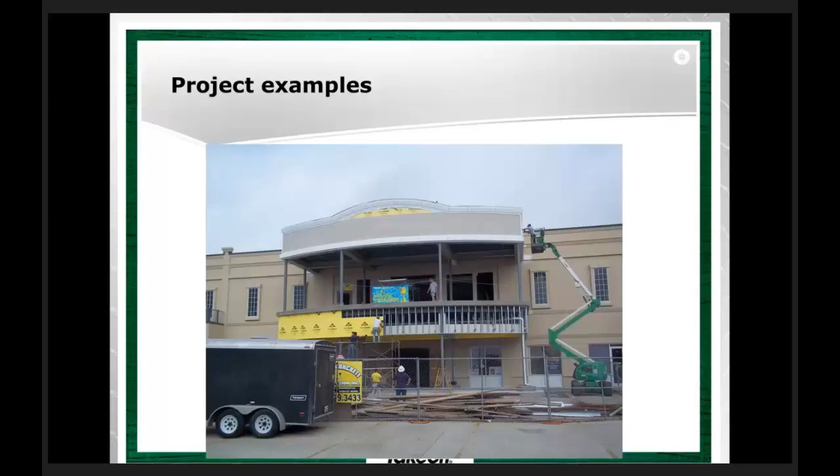That's great. So obviously it's going to help you gain the ability to bid more projects, which will have an effect on your bottom line. Yes, once you really get quick at it, you can knock some sheets out really, really fast.

Now, in regard to this project, what would you do differently if you were to do this project again? The one thing I would probably do differently is definitely have more meetings with the owners about all the changes they wanted to make up front, which really would have saved us a lot of time getting the estimate out and more accurate the first time, because we had a lot of revisions on this project. We have an owner that's pretty picky and also wants to save money at the same time, so they made a lot of changes. It would have been a lot better if we could have gotten that solved up front, and it would have made everything go a lot quicker.

Sure, understandable. It sounds like the overlay feature in On-Screen Takeoff helped streamline that communication a little bit, allowing you to identify those changes immediately. Yes, it does.

We actually had conference calls with the owner because one of the owners lives out of state. We literally overlaid the drawings while on a conference call and discussed the changes they were making. One owner was talking to the other owner, since they're partners, and they were actually disagreeing while we were on the phone, and we were trying to make suggestions to them too. So the overlay feature really came into play.

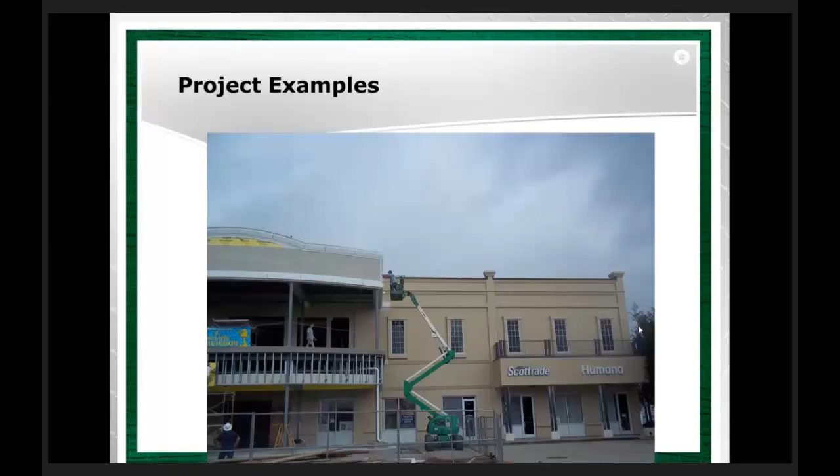So Ricky, we have a few questions from the audience I want to pose to you, if you don't mind. Sure. Question one, which pieces of automation do you own from Vision InfoSoft? We have the EBM Pro 3000 that we use, and we have that linked up with the On-Screen Takeoff Pro.

Question number two, where do you get most of your business from? Most of our business, we do a lot of public bid, and we also have a lot of private entities we deal with, a lot of continuing customers. We do work for banks, a lot of banks. We have a couple of high-rise buildings in downtown New Orleans we do work in. We're actually in a couple of oil refineries as well, one here called Valero, and the Domino Sugar Refinery, also in our area. So we try to stay diversified, and a lot of it is reoccurring business. We try to maintain a real good relationship with our clients and have reoccurring business with the clients we have.

I have one last question. How many people that work for you use the software, and how do you train them? Actually, I am one of the only people right now that do.

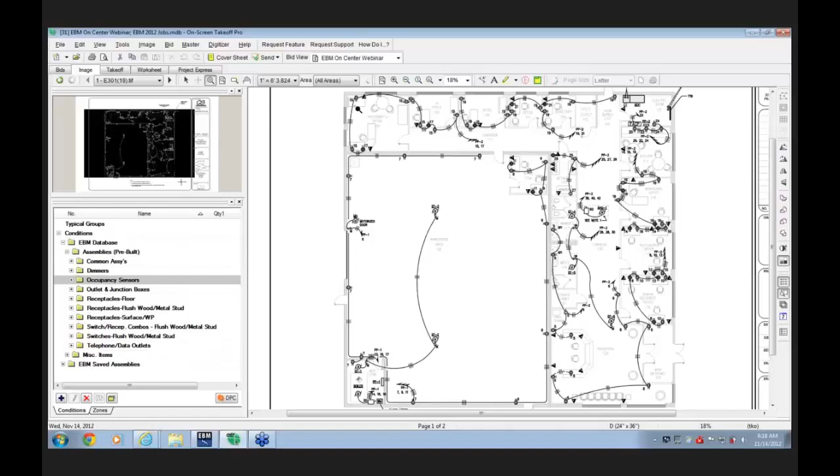So I'm going to start by counting some receptacles here. I think I'll zoom in a little bit further so you can see a better view of the drawing. Over here I have a folder called Receptacles, Flush, and Wood or Metal Stud.

I'm going to go to Duplex, and then I can pick any of these assemblies. You can see they all have different color associations or color codes with them. I'm going to pick this 20 amp duplex with a spec grade receptacle with a plastic plate. Then to count, I just click with my mouse.

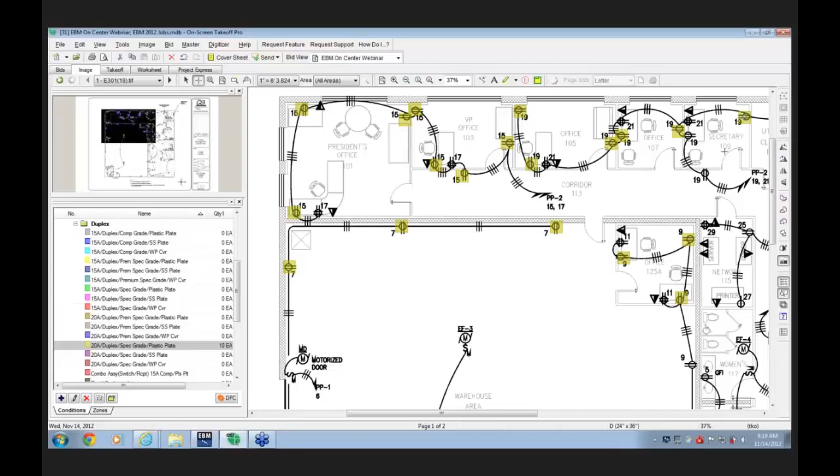You'll see it makes a mark on it, similar to how it would with a highlighter if you were counting manually. So I'll just click through a few of these, and then continue on to the rest of the drawing. Now, you don't have to finish counting all the receptacles at any point. You can come back later and count the rest of them, or move to a different item or assembly at any point.

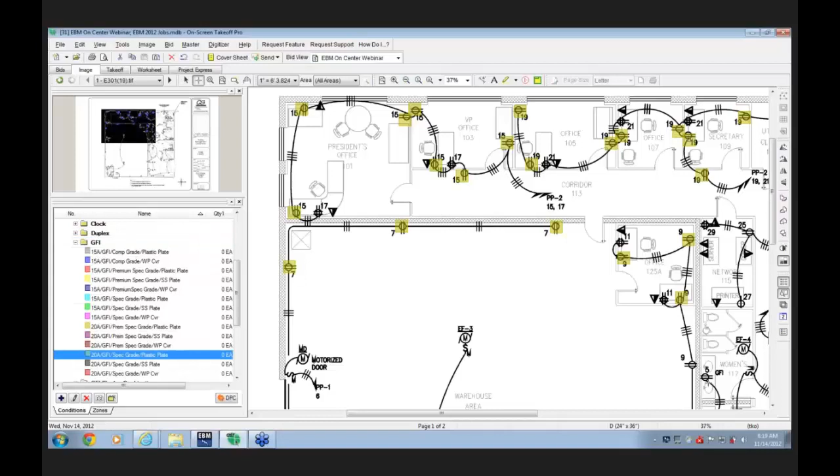Now the count so far is 21. I'm going to count a different item next. I'm going to go to the GFI receptacles. Down here is a 20 amp spec grade with a plastic plate. I see one here. I can move over and down the drawing with this little black window called the pan window. There's another one down here. I'll close that folder and do one more count.

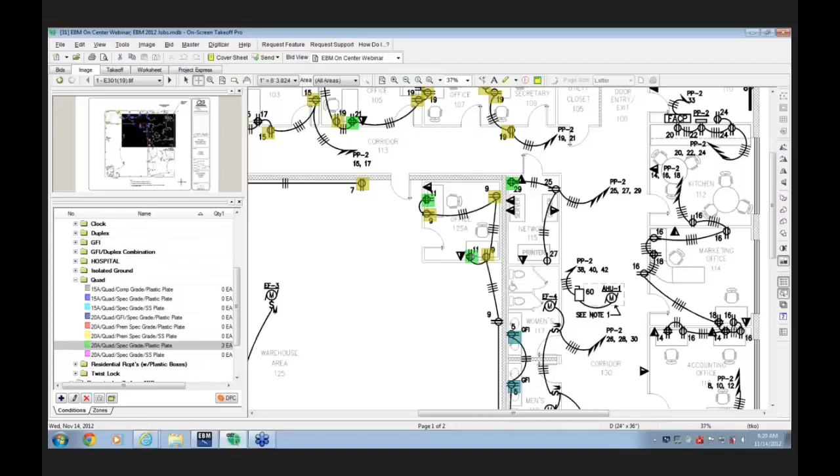I think the concept is pretty straightforward here. I'm going to go to the quad folder, and there's a 20 amp spec grade with a plastic plate. That's this little symbol with the cross hatches here. And again, I'll just move on.

Okay, now at any point that I want to take what I've done so far back into the estimating program, into Electrical Bid Manager, I just click down at the bottom where it says EBM, and I go to the import window. So everything I've taken off so far is going to come into this little window. It even puts in the page number here, so if that page number E301 is already categorized on the takeoff.

And then I see my assemblies here. Here's the counts, these are just the assembly numbers. Now this box is not checked because they haven't actually been entered into the takeoff yet. So I'm ready to go ahead and do that. I just highlighted all 3 lines. I'm going to hit F2 takeoff at the bottom, and it's going to put those into my estimate.

Now those are assemblies. Those assemblies generate all the materials for each of those outlets, a box, a plate, a receptacle, a plaster ring, and even all the screws and pigtails. On my audit trail, I can always look at that entry or those entries.

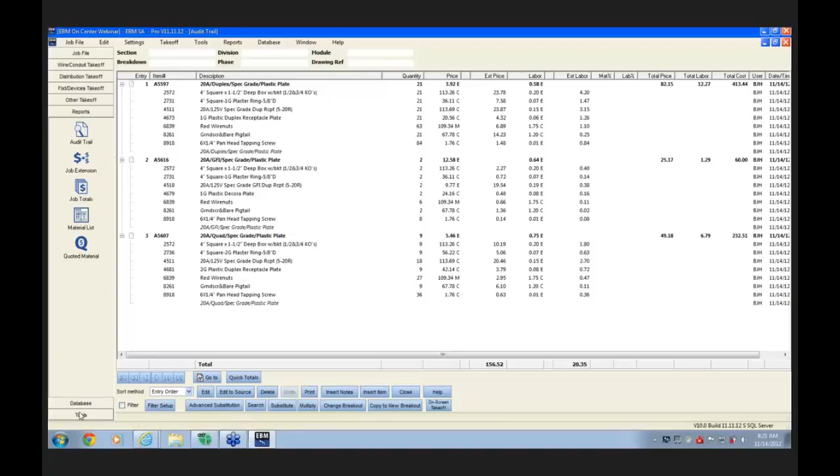So there's the 3 entries I've made so far with all the parts that go with them. So to continue my takeoff here, I'm going to go back to On-Screen Takeoff. I'm going to zoom out a little bit. This is the zoom out button.

And let's talk next about doing a measurement. I'll zoom in just a little more here. Down in the right part of this particular screen that I'm looking at right now is a 60 amp fusible disconnect for an air handler unit, and it feeds back to panel PP2 at the top right. So I'm going to measure that home run.

So I'm going to come down here to the category with the assemblies for the EMT takeoff. And that first one here is 1-inch EMT with 3 number 6s and a number 10.

So to measure, all we do is click on the start point, drag the mouse straight up, and at the point I'm going to turn over to the right, I let up on the mouse and drag it over to the right. Now at that ending point, I can add a length here, because I might have to drop down from the ceiling to that panel. I'll just put in 10 feet.

Now notice over here my distance is set to 49, or my length is already measured at 49 feet. When I add that 10 feet, it bumps it up to 59 feet.

When I go back into the on-screen takeoff, to Electrical Bid Manager, I'm going to refresh my import window, and there's the next entry. Now this one I'm going to review the final entry before I finish it, because I might want to add some additional fittings or elbows to this entry.

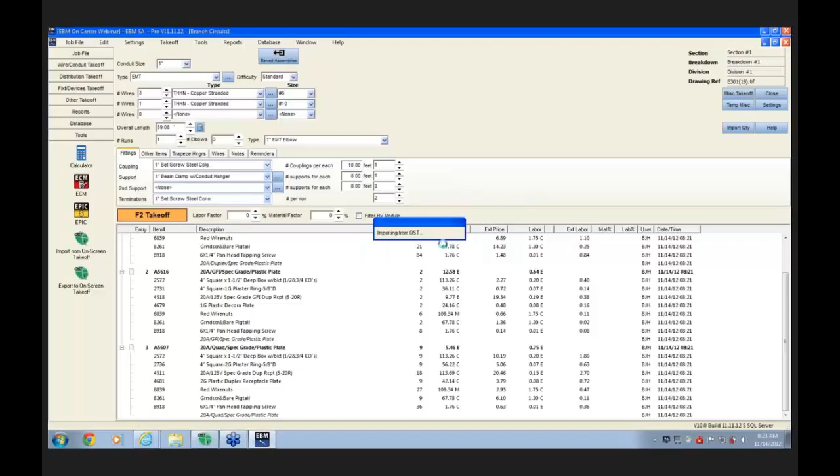I'm just going to hit F2 takeoff. This is makeup wire. Takes me back to the spreadsheet so I can see that that line has been entered. That's what the check mark means. And then I can just proceed with my takeoff.

Now just one little shortcut that I find really handy in the on-screen takeoff. I think you probably will use this on every job. If I want to count some more duplex receptacles, I don't have to go find them again. This little button called the select button allows me to select something I want to continue counting.

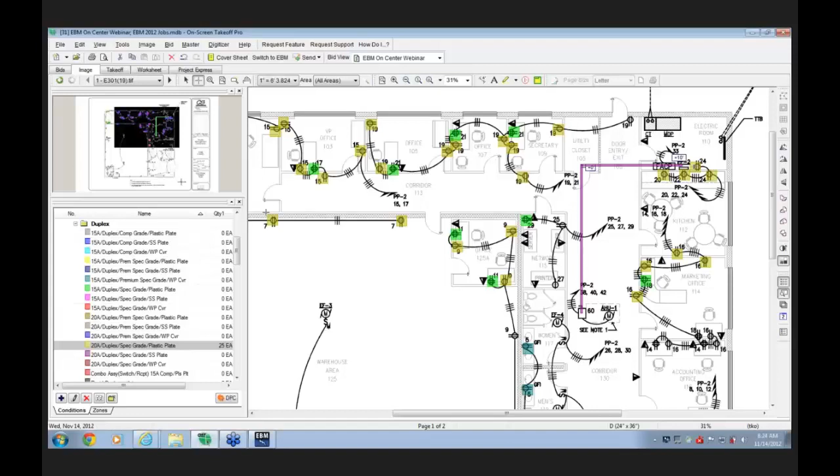And so now I just click on some more receptacles. It's going to update my count. I'll move back down here, and you can see how you can just continue with the takeoff. Now, at this point, I'm up to 31.

When I go back to EBM and hit refresh, there's the 6 more receptacles I counted. I'm just going to hit F2 takeoff, and it combines the quantity up here.

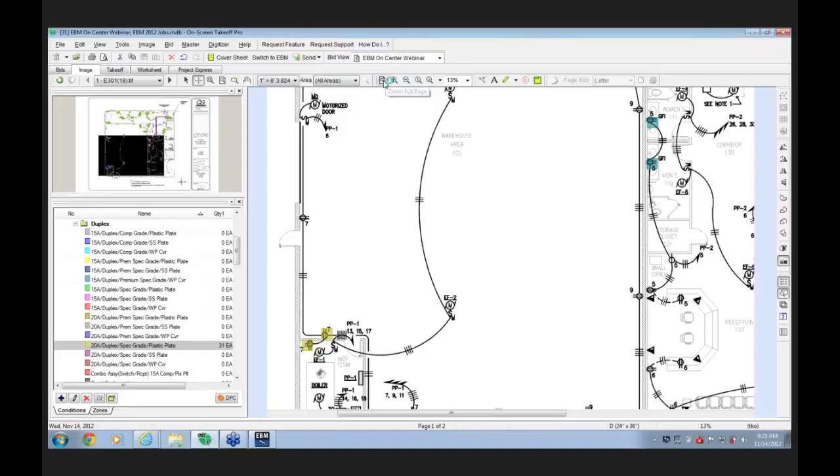And just one more quick thing before we go to the auto count feature. If I go back to the full page here, I can see everything I've done so far. I can also, and this is something that Ricky referred to as that will help you when you're actually doing the work in the field, it's called the image legend. That little button puts a legend up here at the top, and I'm going to make it a little bit bigger.

When I print this out, it'll not only print out with all my markings and colors, it'll give me a complete takeoff on what I've measured and counted on that page. Like Ricky said, you can see how I routed the home run for the air conditioning and air handler unit, and all the receptacles have been counted.

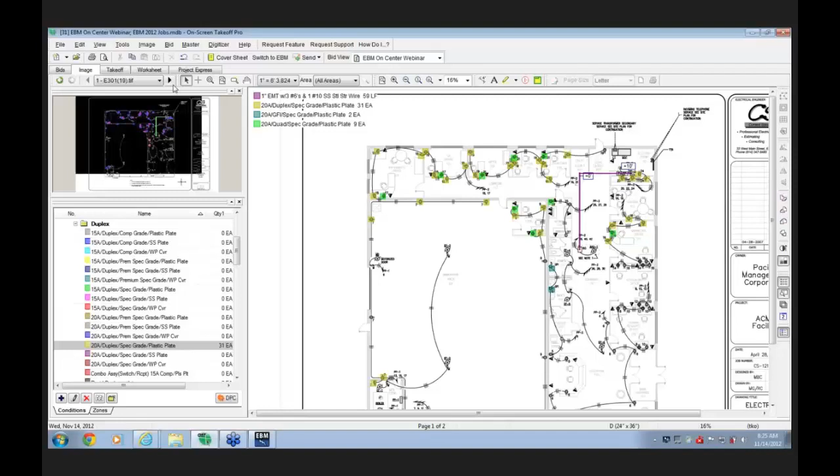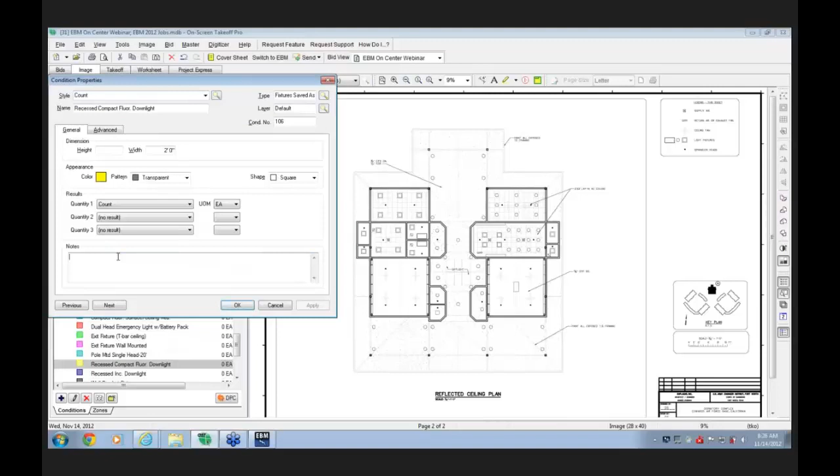I'm going to move to the other drawing here to do some auto count on the lighting, and I'll give you one quick example. We've got a category of assemblies that are standard in the program, the way it comes off the shelf. I'm looking for this recessed compact fluorescent downlight. When I double click on that condition from EBM, I can put the fixture type—if that's fixture A, I just put it in the notes here. I can also change the color to something a little brighter, like that nice color.

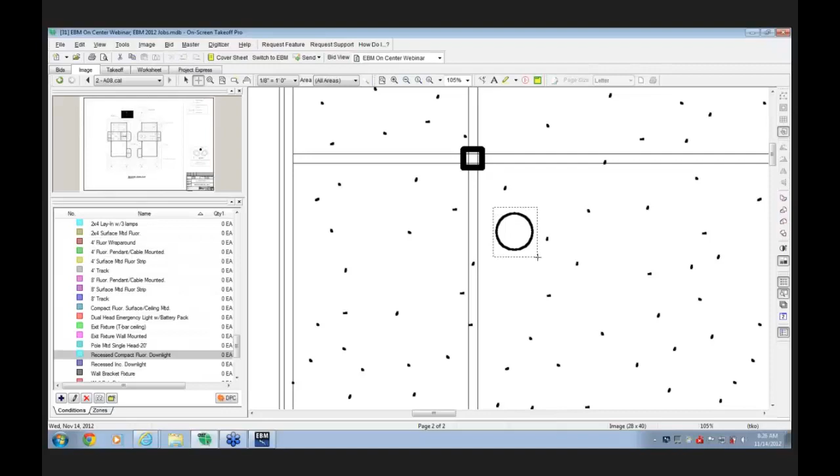Now to auto count, I'm going to zoom in. This is the fixture I want to count, this little round one here. The auto count tool has a little icon, or we can simply go to tools and select auto count. Then I'm just going to draw a little box around the symbol I want it to look for on the drawing, and I'll hit search.

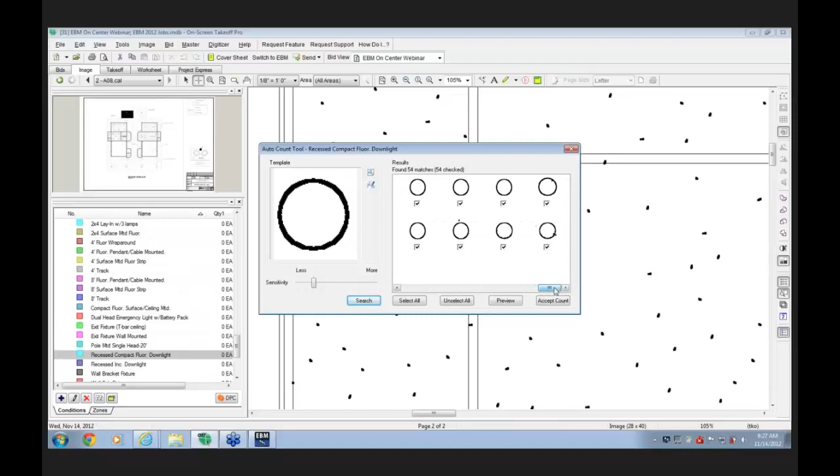So it's going through that whole page, and then it's going to give me the results that it found. It counted 54 fixtures. I can scroll through that just to see if it counted anything that it shouldn't have. When I hit accept count, I can then go back to the full page and review my takeoff.

Now when that goes back to EBM, to the spreadsheet here, I hit refresh. Again, I can double click on that item and it brings me to the fixture takeoff and fills in as much as it can. So I'm going to put a lamp in here, and add a fixture whip, and then there's the quantity, 54, and hit takeoff.

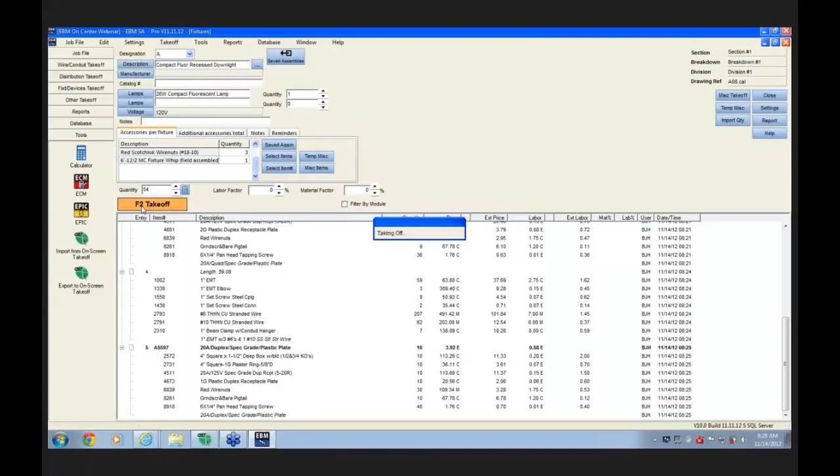So this spreadsheet is basically your entire takeoff that's come from the electronic drawings. You can measure, you can count, and you can even do auto count. So that completes my part of the presentation.